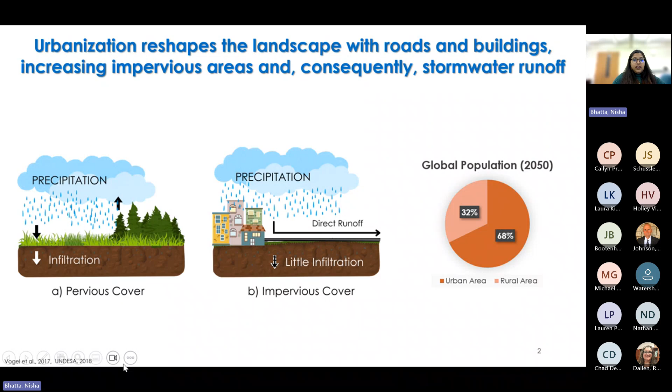So to manage the stormwater, we rely primarily on gray infrastructure. Gray infrastructure includes systems like pipes, channels, culverts that are designed to convey stormwater directly to a destination. These systems are effective in flood protection in many scenarios. However, the gray infrastructures in many areas are aging and their existing capacity to manage larger volumes of stormwater is decreasing in areas across the country. They often come with drawbacks such as faster flows and altered channels, which can lead to increased flood risk and significant water quality degradation.

So to improve stormwater management, a modern and sustainable approach is established, which we know as green infrastructure. They use vegetation, soils, and other elements and practices to restore some of the natural processes required to manage water and create a healthier urban environment. Instead of just conveying stormwater, it passively treats the water while managing the runoff. Green infrastructure helps to reduce the volume and peak flow. It also enhances infiltration, recharges groundwater, and ultimately improves water quality.

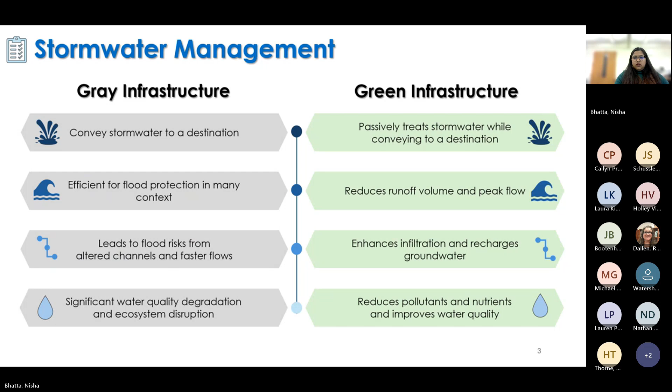Why is my slide not working? Sorry, there were some technical difficulties. Our screen froze here. So yeah, I will just go back.

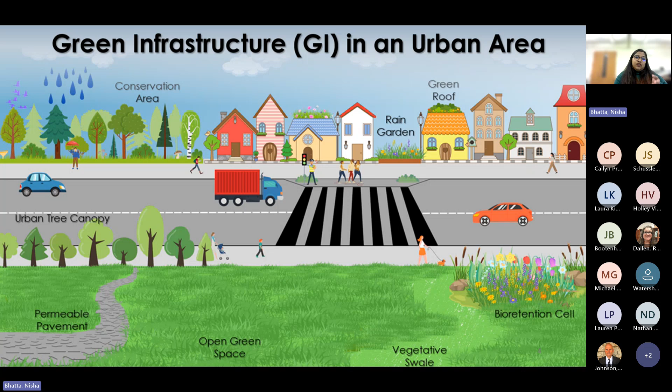When green infrastructure is installed throughout a community, a city, across a regional watershed, it can provide cleaner air and water as well as significant value for the community with flood protection, diverse habitat, and beautiful green spaces. So the overarching objective of my research was to select and evaluate the performance of green infrastructure for managing stormwater runoff using a decision tree framework and hydrologic modeling.

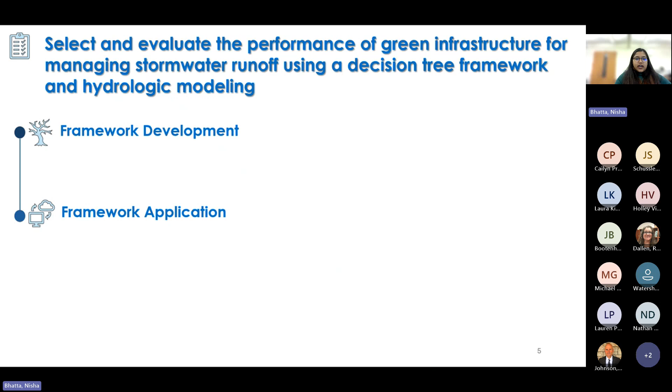To do that, I divided my objective into two different parts. One was framework development and the other is framework application. Using diverse literature, we developed a decision tree framework for the selection of green infrastructure practices, and to apply the framework to a case study area, the Washington School, we analyzed 30 years of local rainfall data, that means the Stillwater rainfall data, to determine the rainfall pattern, and lastly, applied the Personal Computer Storm Water Management Model, aka PCSWMM, a modeling software to assess the impact of different green infrastructure practices on the site hydrology.

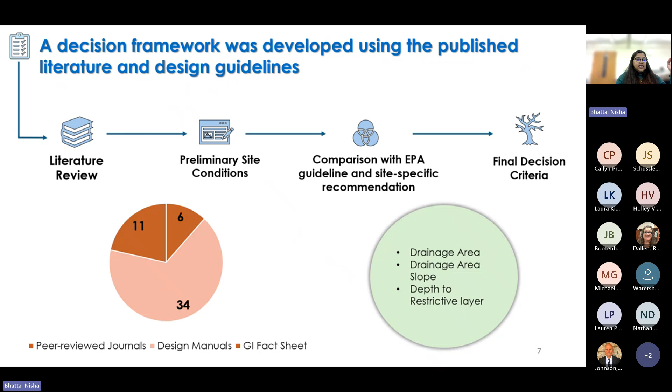Focusing on my first objective here, to develop the decision tree, I used published literature and design guidelines to select preliminary site conditions such as drainage area. In this process, 6 peer-reviewed journals, 34 different state manuals and 11 green infrastructure fact sheets from EPA were reviewed. After selecting these preliminary site conditions for each green infrastructure, I compared them with EPA guidelines and site-specific recommendations for different states. And then these 3 final criteria were selected and each GI was assigned to different categories.

Now I am going to walk you through my decision tree framework. So the framework starts with the distance from the green infrastructure practice to the existing structure or building foundation. If it is less than 10 feet, non-infiltration based practices are recommended. And if it is more than 10 feet, infiltration based practices are recommended.

Because infiltration based practices allow water to percolate into the soil, if these are placed too close to a building, the increased water infiltration weakens the soil around the foundation, leading to settling, cracking, or structural damage. Next, we have the drainage area, which is categorized into 4 categories.

That means less than or equal to 1 acre, less than or equal to 5 acre, less than or equal to 10 acre, or no restriction, which means the drainage area may not have any effect on this practice.

Following that, we have depth to restrictive layer, for example groundwater table. For most green infrastructure practices, the depth of restrictive layer from the bottom of the practice should be at least 2 feet, because if the restrictive layer is too shallow, water cannot infiltrate properly and may pool within the GI practice, reducing its efficiency.

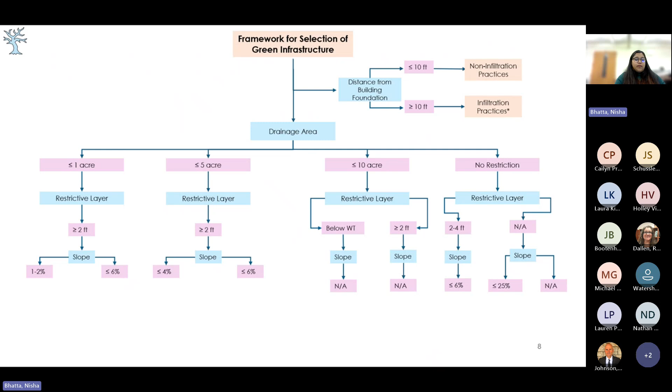Finally, we looked at the slope of the site area as a percentage. Some practices may require low slope, whereas some practices can be installed in high slope areas as well. Based on this criteria, each GI was assigned into different categories.

After developing the framework, we selected Washington School in Stillwater, Oklahoma as our case study and applied the framework to this case study site. Washington School was established in 1938.

It was the first school to offer a high school diploma to Stillwater's African American community. This school was centrally located in the floodplain and intentionally beyond both city limits and flood insurance bounds, an area residents refer to as the bottoms.

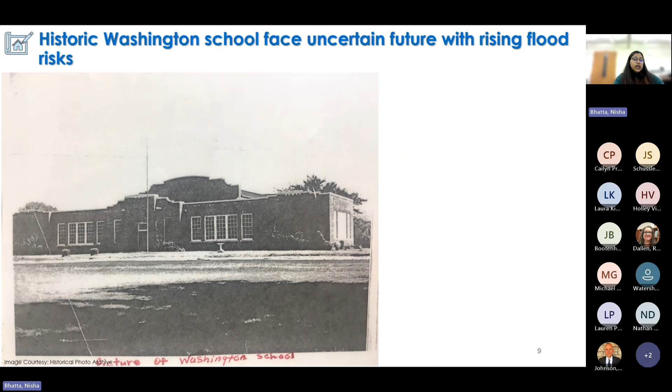Historical photo archives suggest that the school was flooded during the 1957 flood. Also, more recently, in 2019, the school was flooded as well.

Currently, the Washington School Alumni Association is working towards revitalization and wants to turn this school into a community center. Green infrastructure will provide an opportunity to increase Washington School site resiliency in wet weather events while providing open green space for the community to enjoy, as it did in the 1940s. For this reason, this school was selected as the case study site.

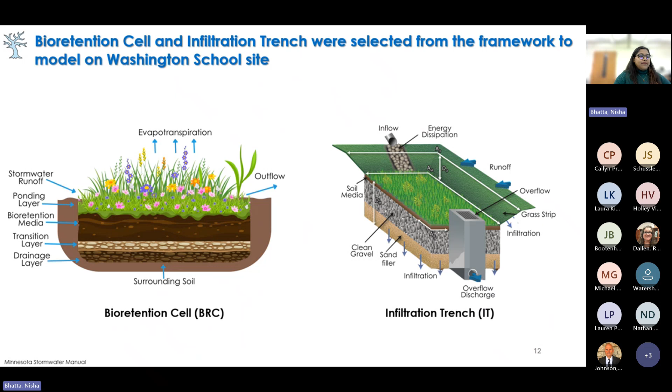The next practice is the infiltration trench, which is like narrow ditches filled with gravel that intercept runoff from upslope impervious areas. It usually has multiple layers, starting with grass and then soil media, followed by a gravel and sand layer. They provide storage volume and additional time for the captured runoff to infiltrate native soil below.

Now moving on to my second objective of my research. I looked at the rainfall pattern of Stillwater, Oklahoma to see which SCS rainfall type is best fitted for this region. I needed the pattern for hydrological modeling in the final and third part of my study.

The SCS rainfall method, developed by Soil Conservation Service, is used to estimate rainfall distribution and runoff. This method used synthetic rainfall distribution patterns type 1, type 1A, type 2, and type 3 to represent how rainfall intensity changes over time during a storm. Type 1 represents low intensity, long duration rainfall, whereas type 2 represents high intensity rainfall distribution over shorter duration.

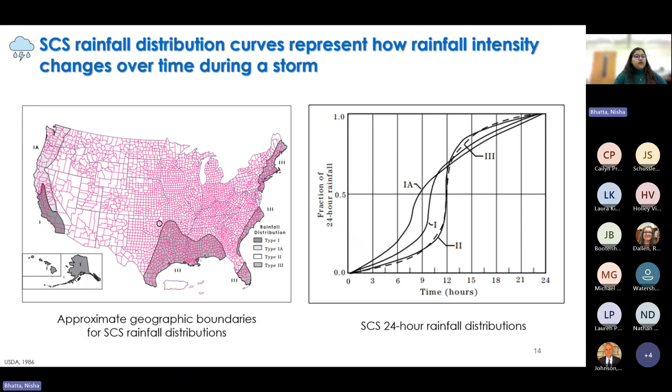According to USDA, Stillwater falls under the type 2 rainfall distribution, and type 2 regions are very close to Payne County as well. However, with the changing climate, we are seeing many rainfall pattern shifts worldwide. So to investigate the actual rainfall pattern for Stillwater, I analyzed 30 years of historical rainfall data for this part.

This slide outlines my methodology for the second objective. The process begins with data collection and processing, where 30 years of 5-minute interval rainfall data from 1994 to 2023 was divided into 3 decades to identify any change in rainfall over time, and the same analysis was also conducted for the full 30-year period.

Following this, storm events are identified using a 6-hour gap, and the top 200 storms were selected per decade, as well as for the full 30-year period. Next, the selected storms undergo normalization, where time and cumulative rainfall values are scaled from 0 to 1 that allow for consistent comparison across the storms.

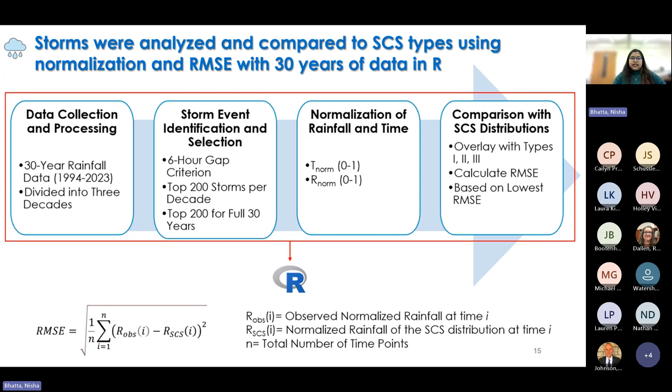Then the normalized storms were overlaid with SCS rainfall distribution, and root mean square error is calculated to quantify how closely observed storms match these standard types, with lowest RMSE indicating the best fit. The following equations shown in the slide were used to calculate the best fit curve, and all of this analysis was done in R programming.

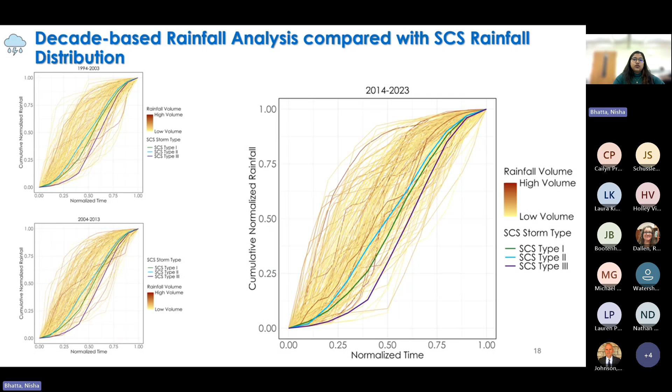Looking at the rainfall analysis results, this is the first decade from 1994 to 2003. All 200 storms were categorized from low to high volume based on total rainfall. Then each rainfall was compared to SCS type 1, type 2, type 3 to see which curve's RMSE value is low and best suited. This is for 2004 to 2013, and this is for 2014 to 2023.

Now looking at the RMSE value for each decade, the results show that SCS type 2 rainfall pattern is the best fitted for Stillwater, with almost 80% type 2 storms for each decade. From 1994 to 2003 has 76% type 2 storms, whereas 2004 to 2013 has 81.5%, and 2014 to 2023 has 79%.

After this decade-based analysis, we also did the same analysis for the entire 30-year period of rainfall, which also indicates that SCS type 2 provides the best fit for the Stillwater region, with 79.1% of type 2 storms.

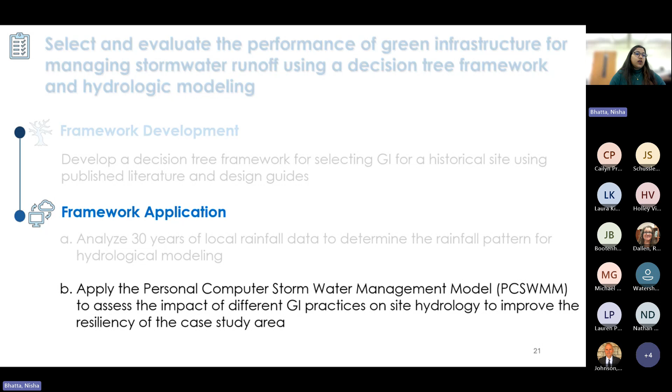Now moving on to my final and last objective, to apply the PC-SWMM model to assess the impact of green infrastructure. PC-SWMM is a comprehensive modeling software developed by CHI that is used for simulating and analyzing urban drainage systems, stormwater runoff, sewer networks, and the impact of green infrastructure.

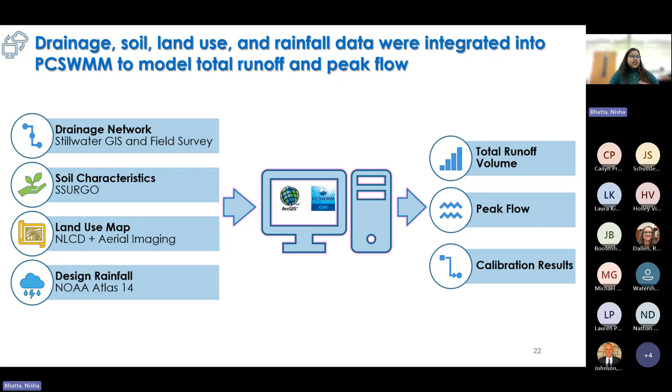My overall methodology for the PC-SWMM model is this. I needed the drainage network, soil, land use, and design rainfall data, which were obtained from various sources. In the next few slides, I will dig a little bit deeper into each of these data sets.

The network was collected from the city of Stillwater. However, there were some missing attributes for conduits and junctions. So we conducted several field surveys to collect those attributes, which included depth, cross-section, diameter, top width, and bottom width, and also the pipe materials for Manning's n.

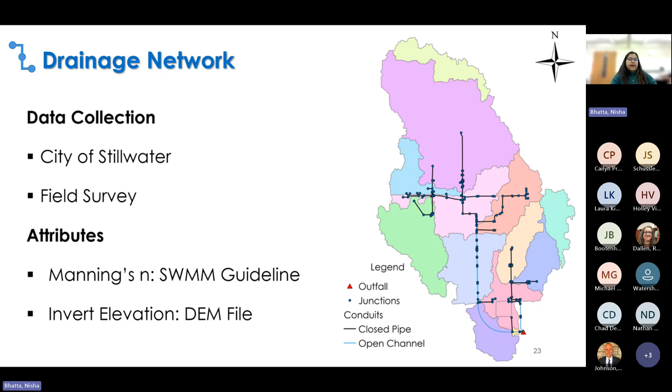The rest of the attributes were either assumed with standard values or analyzed using the upstream and downstream attributes.

One of the very important parameters for any PCSWMM model is the soil characteristic, which I needed for each subcatchment. After dividing the watershed into smaller subcatchments, I calculated the attributes of each subcatchment, which heavily depend on the hydrological soil group. This is a classification of soils based on their runoff potential, with four categories: A, B, C, and D, where A has the lowest runoff potential and D has the highest. In my watershed area, there were three types of soil: B, C, and D.

The saturated hydraulic conductivity of a soil is a crucial parameter that describes how easily water can move through porous materials when they are fully saturated. All of these values were collected from the Web Soil Survey and SWMM manuals.

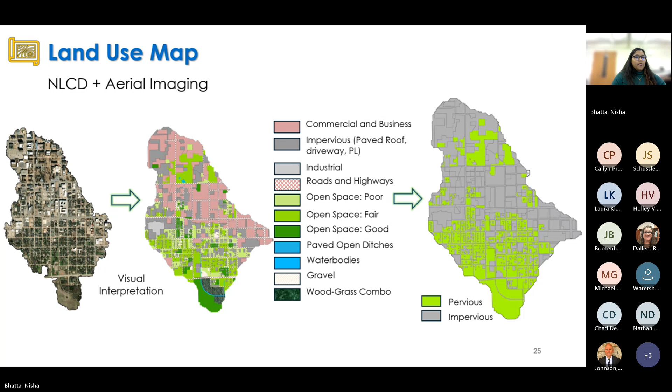Finally, I needed the design rainfall for my hydrological model. Design rainfall is the amount of rainfall used in planning and designing stormwater management systems such as drains, culverts, and flood control structures. It is based on historical rainfall data and represents a hypothetical storm event of a specific duration and intensity that a system should be able to handle.

To design a rainfall, four types of data are needed: rainfall pattern, return period, storm duration, and total rainfall. From objective 2, we already found that the rainfall pattern is SCS Type 2. The storm return period, also known as the recurrence interval, refers to the estimated frequency of a rainfall event of a certain intensity and duration, typically expressed in years, like 1 year, 2 year, 5 year. A 5 year return period was selected for my studies.

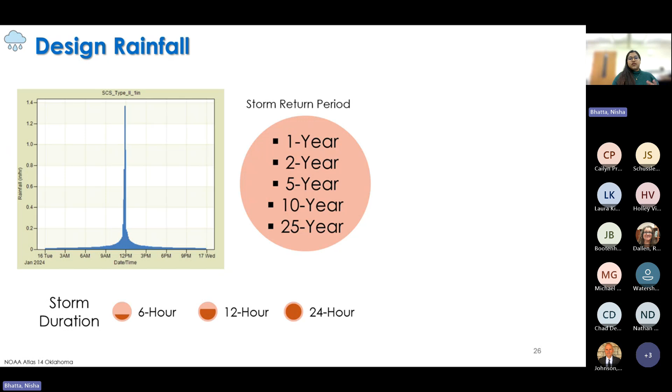Finally, I selected storm durations for 3 different storms, like 6, 12, and 24 hour, to see how green infrastructure performs under different durations of rainfall. We also got the total rainfall from NOAA Atlas 14 for each of these storms. So a total number of 15 design rainfalls were developed in this study, which is shown in the table.

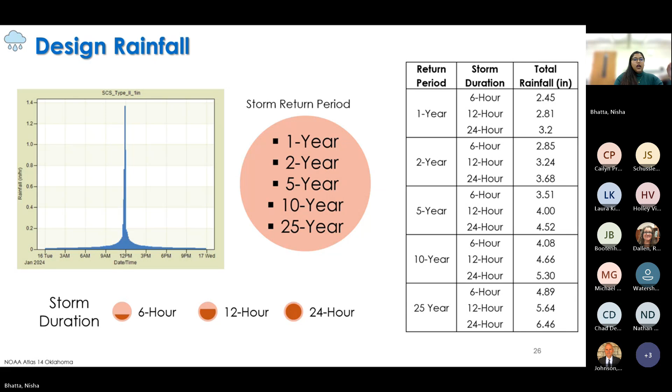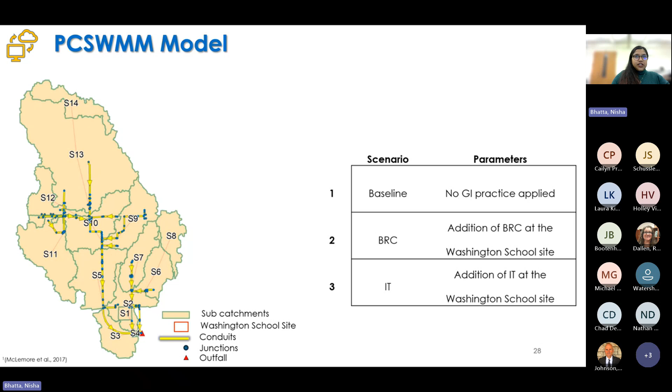Now that I have all of my data, this is my PCSWMM model, incorporating all of the layers like subcatchments, conduits, and junctions. We then created three scenarios: one is a baseline scenario with no green infrastructure practice, and then BRC and IT, with bioretention cell and infiltration trench respectively.

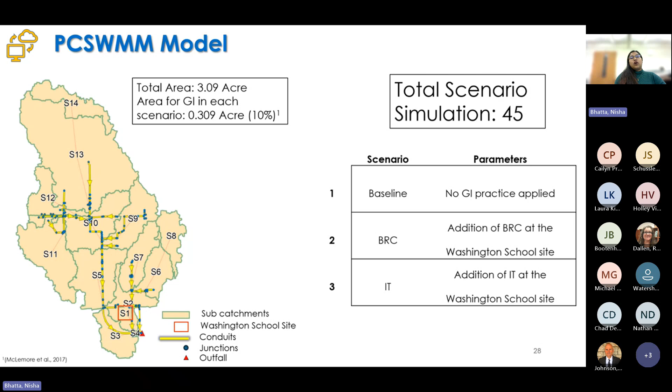With 15 different design rainfalls, the total number of scenario simulations was 45. Each green infrastructure practice has an area of 0.309, which is 10% of our site area, the Washington School area.

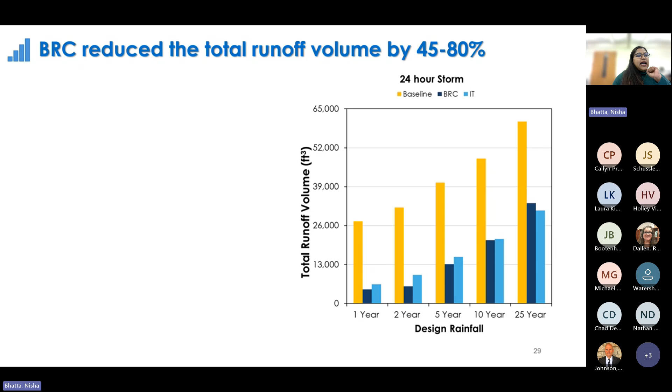This figure compares the total runoff volume for different design rainfall events under three scenarios for 24-hour storms. The result shows both GI practices reduce the runoff volume significantly compared to the baseline. However, their effectiveness varies depending on the storm's intensity. The BRC is effective for managing smaller to moderate storm events but becomes slightly overwhelmed during extreme rainfall, whereas IT provides better performance under high intensity due to higher infiltration capacity.

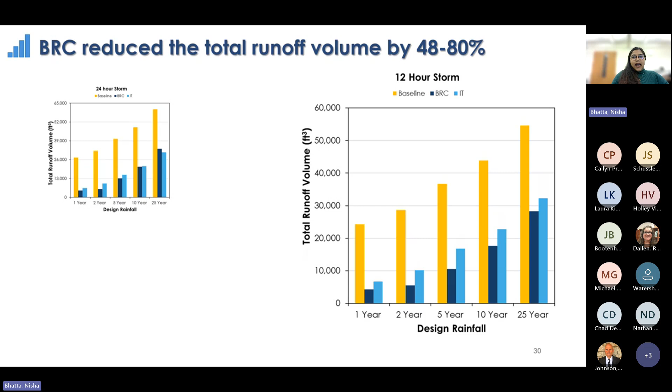For 12-hour storms across all return periods, the bioretention cell consistently achieved better runoff reduction compared to the infiltration trench. And for the 6-hour storm, the bioretention cell again outperformed the infiltration trench by reducing the runoff volume from 53 to 80% across different return periods. The results suggest that the bioretention cell is effective to manage stormwater runoff for smaller to moderate storms, but may not be as effective for larger storms. Comparing both practices' performance in the model simulation, the bioretention cell is clearly a better solution for this site in this study.

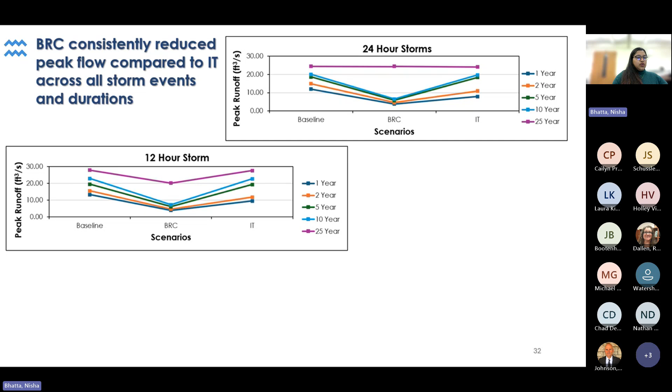Next, we measured the peak flow reduction. This figure compares the peak runoff rates in different design rainfall events under these three scenarios. For the 24-hour storm, BRC shows similar trends like the reduction of total runoff volume. It was able to reduce the peak runoff significantly for smaller to moderate storms, but did not reduce peak runoff for the 25-year storm. For the 12-hour storm, BRC outperformed IT across all storm scenarios, reducing the peak runoff by 28 to 71%. A similar trend was seen in 6 hours, like the 12-hour storms. BRC was the most effective in reducing peak runoff based on this study as well.

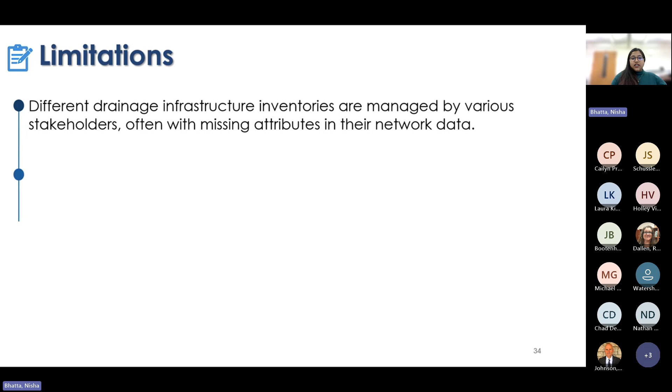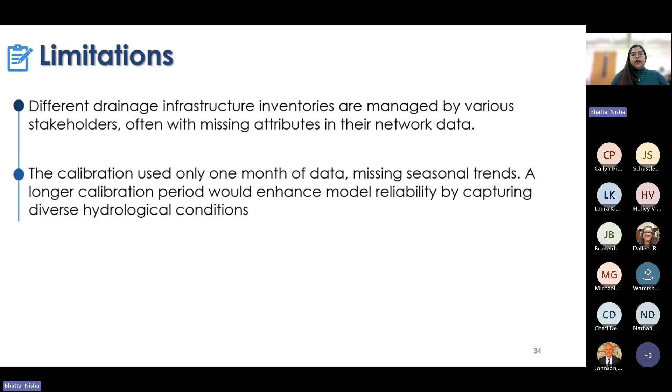Having said that, we are acknowledging the limitation of the study that different drainage infrastructure inventories are managed by various stakeholders, often with missing attributes in their network data. And PCSWMM heavily depends on the hydraulics of the model, so that will be one limitation of this study. And the next limitation is the calibration used only 1 month of data, missing seasonal trends. So a longer calibration period would enhance the model reliability, which is ongoing currently.

Key takeaways from my research: developing a tailored framework for selecting effective green infrastructure practices for flood-prone sites, focusing on site-specific factors. Next, despite the national trend of changing rainfall, Stillwater still has the SCS Type II, consistent and supporting reliable modeling outcomes. The simulation showed that the bioretention cell is the most effective in reducing peak runoff and controlling volume for the Washington school site. And the combination of decision tree framework, rainfall analysis, and PCSWMM modeling offers a replicable method for sustainable green infrastructure solutions at other sites.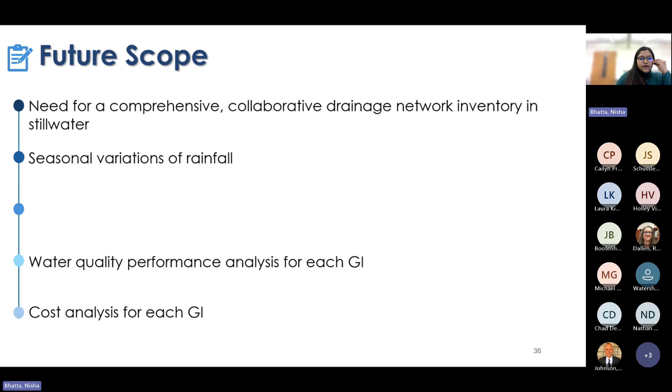My future recommendation for this study is we need a comprehensive and collaborative drainage network inventory. We also need to look at the seasonal variation of the rainfall affecting the model. We need water quality performance analysis for each GI. We also need to do cost analysis for each GI and identify suitable upstream locations for green infrastructure practices to manage the stormwater runoff in the upstream.

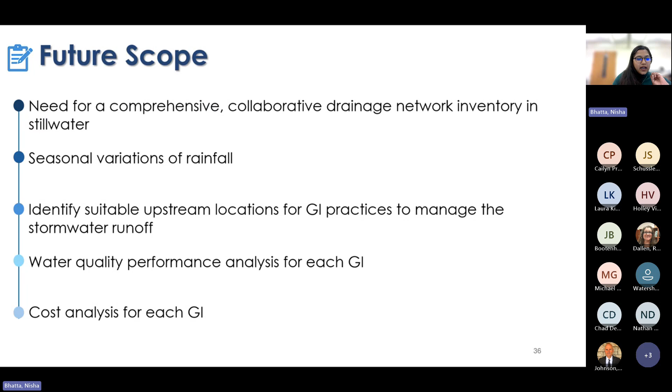I'm sorry, I have no idea how my animation messed up here a little bit. Sorry for that.

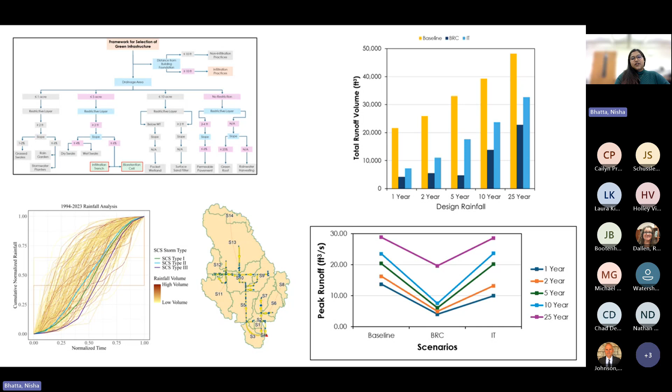And finally, this is a summary of my whole research project. We developed a framework, analyzed our rainfall, developed a PCSWMM model, and finally found the total runoff volume reduction and peak runoff reduction for green infrastructure practices.

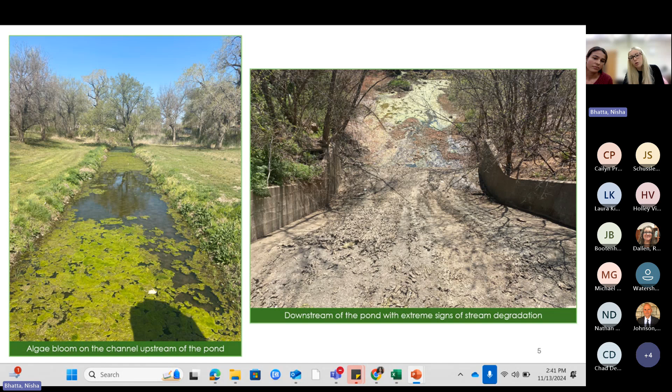So this is the inflow stream. As you can see, there's major algae growth, there's no riparian buffer. If there's any flow, it's not quite visible. And then the other picture shows the spillway that leads to the outlet stream. It's quite a steep spillway. We can also see that there's no water flowing off it continuously. We can also see below that there's major stream erosion going on down here. So lots of things to fix.

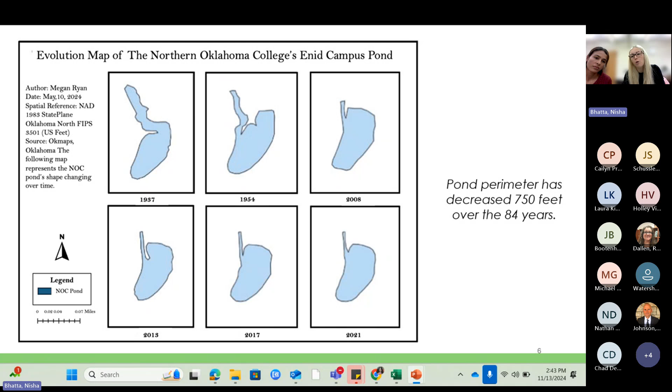And then fast forward to 1954, a similar shape, however, it is still changing, but we can make out how this would change. And then if we fast forward to 2008, it's very different than what it was in 1954. And this shape has continued until 2021, with some type of, I guess, erosion occurring. So I compared 1937 to the 2021 perimeter, and I found that this actually decreased by 750 feet over this 84-year time period.

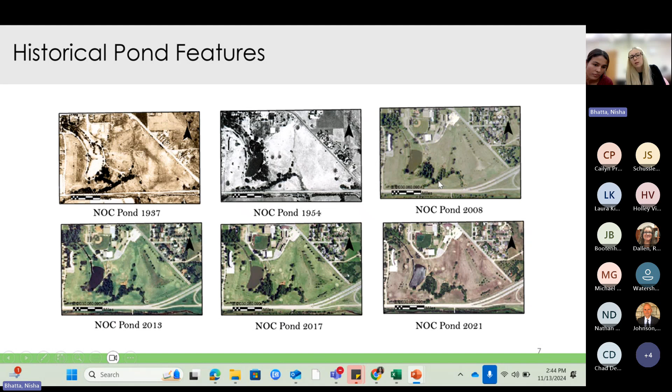We can also see a slight increase in vegetation. There's a few more trees in the 2008 to 2021 series of photos than there is in the 1937 to 1954 series of photos. So here's two of the objectives we're going to talk about today and what we'd like to accomplish. We want to identify opportunities to increase recreational use and encourage habitat in and around the pond. And then our second objective is to develop a green stormwater infrastructure plan for sustainable stormwater management around the pond.

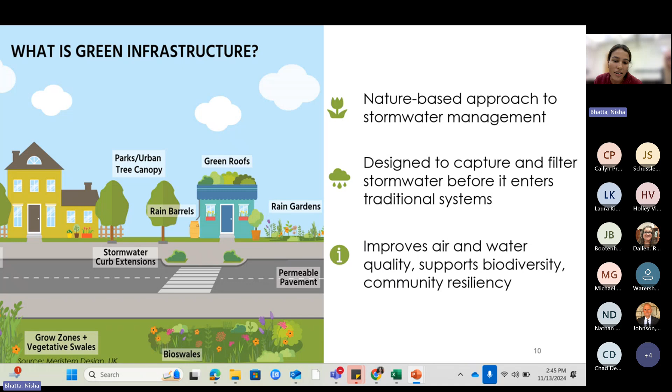So, as we all know, green infrastructure is a nature-based approach to stormwater management. They are often termed nature-based solutions or low impact development. And these are very beneficial in capturing and filtering stormwater before it enters our traditional drainage system. There's several benefits of green infrastructure, such as it helps in improving air and water quality, helps our landscape look prettier, supports biodiversity, and helps make our community more resilient against the changing climate. There's several types of green infrastructure, as you can see in this picture. There are green roofs, rain barrels, rain gardens, and all of them serve the same purpose, which is stormwater management.

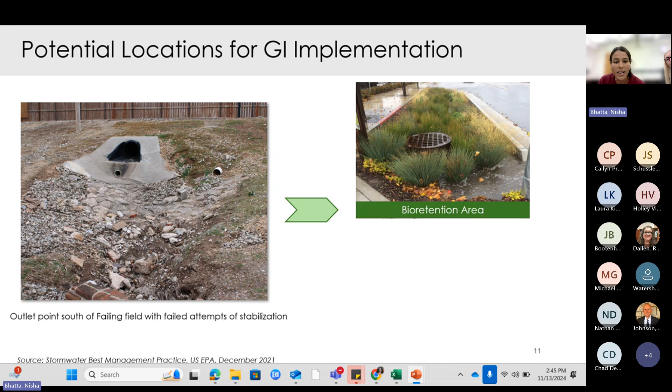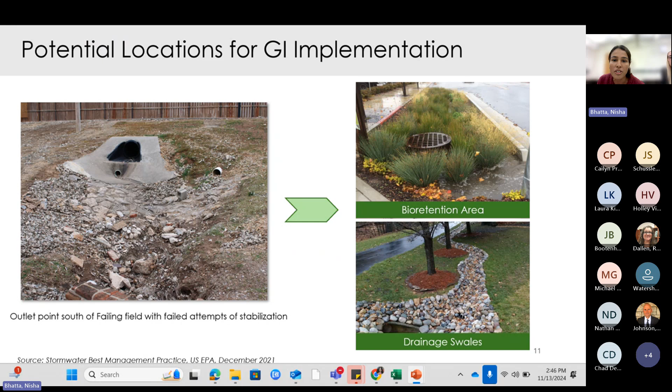So in this area, we can add a bioretention area, or we can also use a drainage swale. It will help in slowing down the water, which will help in reducing the erosion, as well as it will help the water infiltrate into the ground, capturing sediments and reducing the runoff volume.

This is another area, which is a parking lot, also located very close to the same baseball field, and you can see several signs of washout. So when it rains, all of this gets picked up by the stormwater runoff, which eventually ends in the NOC pond. So for this, we can have a parking lot bioretention.

We can also opt for permeable pavement. But for this location, we are also considering relocating it to a different location because this area is a little slopey. And we are planning to turn this area into more greener space.

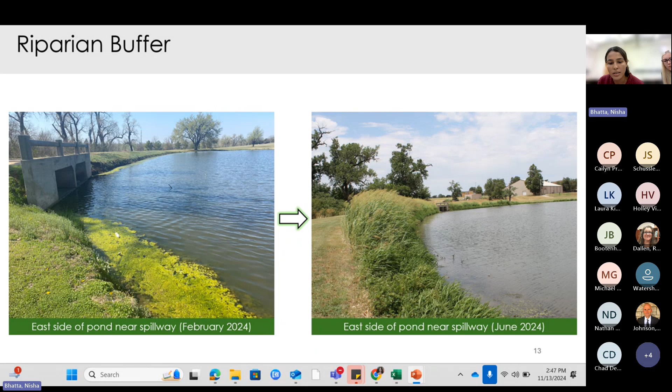And as you can see in the picture on the right, now we have plants that help in slowing down the water, capture some sediment and other trash, and also help reduce the bank erosion.

Okay, so now we're going to switch over to some of the baseline data that we've been collecting. So we wanted to get an assessment on the community side. So we distributed an online survey that should have taken about 15 minutes, and it had 25 questions on it regarding a few things. This survey was distributed to the NOC students, staff, and faculty, and it was also distributed to the community as needed via flyers.

We received 197 responses from the survey, and we found that most people that answered were students, some faculty and staff, and a few community members.

One of the questions addresses the current recreational usage. It says, if you or someone you know currently uses the pond or area surrounding the pond, what activities have you participated in? And it seems as though most people that use this area use it for walking. We have some people that use it for fishing, a little bit of golfing, and a little bit of dog training and biking.

Another question regarding recreation is we wanted to ask individuals, what is their level of satisfaction with outdoor recreational opportunities on the NOC Enid campus? And from what we received, people are mostly neutral with the satisfaction of recreational opportunities. Some are satisfied and some are unsatisfied. So a pretty neutral response for this question.

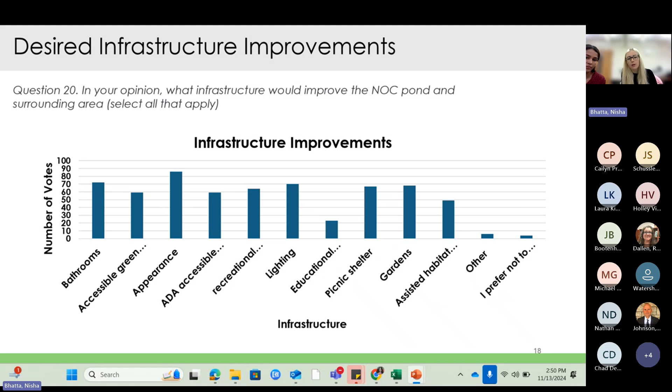In terms of infrastructure improvements, we asked this question: in your opinion, what infrastructure would improve the NOC pond and surrounding area? People mostly just want to see an improvement in the appearance of the area. They'd like to have some lighting here. Accessible bathrooms were popular as well. Yeah.

And then as for the education component from our survey, question 22 asked, how likely are you to observe or read informational signage, including the environmental/ecology function of the NOC pond? And it seems that people would be likely to read the signs, which helps us determine that it's okay to put educational signs up in the area. It's something that I was really hoping to do, so I was happy that people were receptive to this.

And then we also wanted to know how we could distribute progress on our restoration. So that's why we asked question 24, which says, what is the best way to educate Enid residents on potential infrastructure improvements on NOC Enid's campus? And it seems as though people would be okay with this being distributed through social media.

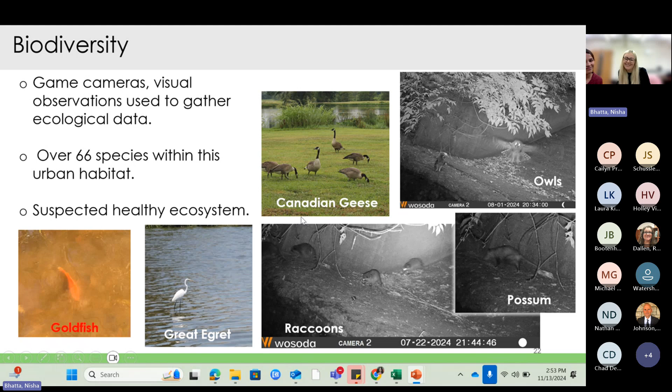An additional ecological assessment that I did was recording bird songs. So I used Merlin Sound ID, which is an app that records bird songs in the area and determines what species it is. So during our weekly site visits, I did a 30-minute recording each site visit, and I found 31 different bird species here. The most frequent species I found were the northern cardinal, the Carolina wren, the indigo bunting, and the American robin.

So I think this is interesting how many different bird species there are here, but I also think this is a great talking point for education signage. This gives us a good opportunity to create signage around bird species and kind of educating the public about what kind of species are here.

This is another assessment I did on vegetation. This is kind of an in the works assessment. I've only done one assessment thus far. So I took a 20-foot by 20-foot area just below the spillway in the wooded area. And I found that there were American elm trees, eastern redbud, and some juvenile red cedars here. I still have to do a few more assessments on this, but I think this is quite interesting and telling of what types of tree species are here.

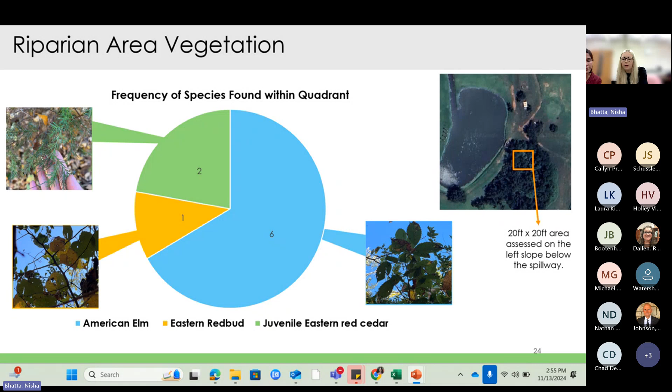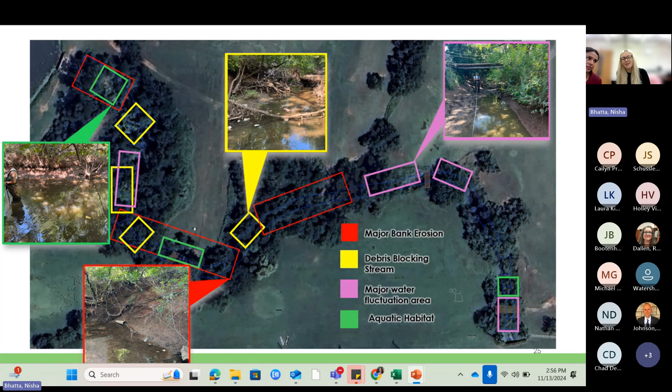And then the next week we would go here and there would be no water here at all. So I think this is also very interesting and kind of telling of where the aquatic species will reside more frequently. And then I also wanted to determine where the aquatic habitats were and where I saw aquatic species. So green areas are kind of areas where I found fish, frogs, some snake species, and some aquatic invertebrates as well.

So as you can see, there's major degradation going on in the outlet stream. So we've kind of come up with a draft restoration plan to improve this. We'd like to implement a riser structure that will allow us to reduce the flow of the outlet stream. And then our next step would be to clean up the debris in this stream. And then we'd like to decrease the slopes on some of these areas that have gully type erosion. And then in these areas, we'd like to implement live stakes, turf mats, and hard armor to kind of establish the vegetation here and make sure that erosion doesn't occur again.

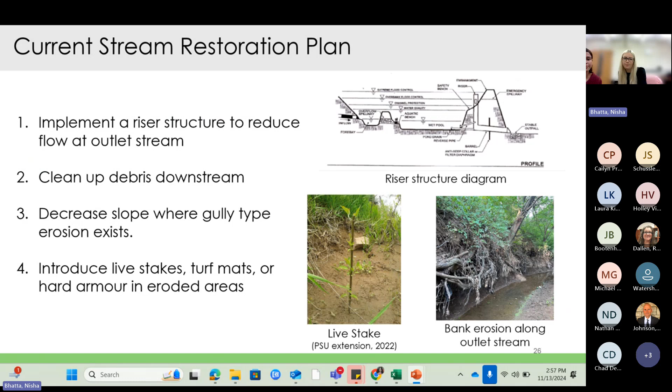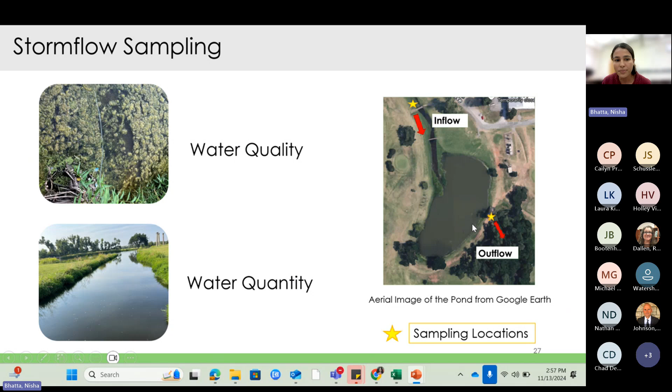So at the inflow channel, we have an ISCO auto sampler, which is connected to a rain gauge, and it's programmed to get triggered by 0.1 inches per hour of rain events. So whenever it rains, the auto sampler gets triggered and it starts collecting the water sample. There are in total 24 bottles, and each bottle is capable of collecting 800 milliliters of water.

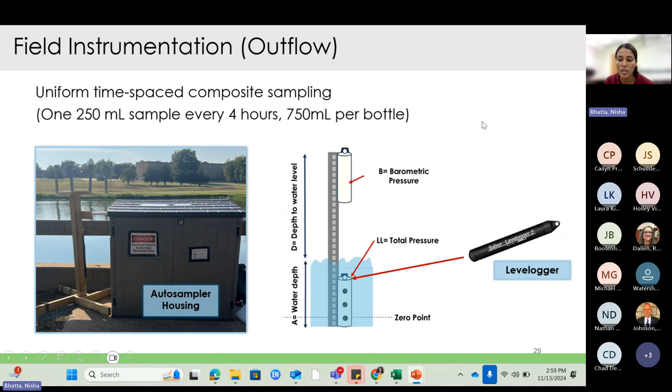This one is not connected to a rain gauge, but this one is programmed to collect water samples in uniform time spacing. And the water samples are composite sampling, which means it collects 250 milliliter sample every 4 hours. So in total, 750 milliliters per bottle every 12 hours. And we also have a level logger installed at the outflow, which is used for water depth measurement.

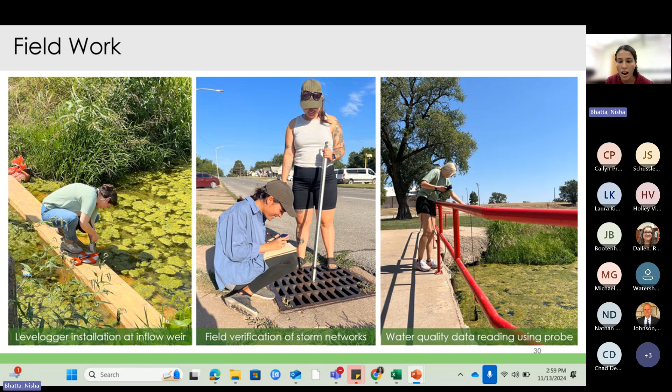And we have been doing water quality monitoring every week. So we have been using a YSI probe to read some water quality parameters, both at the inflow and the outflow of the pond. So using the YSI probe, we are looking at the pH, nitrate, temperature, and dissolved oxygen. We were trying to see if we can see any variation in these parameters with respect to the rain event.

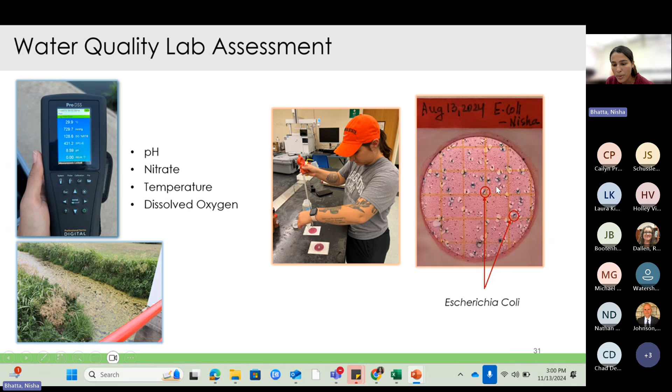And we have also been collecting grab samples during each site visit, and we analyze those samples for E. coli. As you can see in this picture, the blue spots with small air bubbles show the presence of E. coli. Other parameters that we're looking at are nutrients, which includes total nitrogen and total phosphorus, for which we are using reagents prepared by HACH. And then we are looking into total suspended solids and turbidity.

So we recently started doing total suspended solids. So we are trying to find a relationship between the turbidity and TSS so that we can also get the TSS value for the previous samples that we didn't originally analyze for total suspended solids.

We are not able to see a proper pattern with respect to precipitation, but the variation could also be because of the time of sampling, because during the daytime there was a lot of algae present in the water, and photosynthesis was going on, which increases the amount of oxygen and could have increased the DO level.

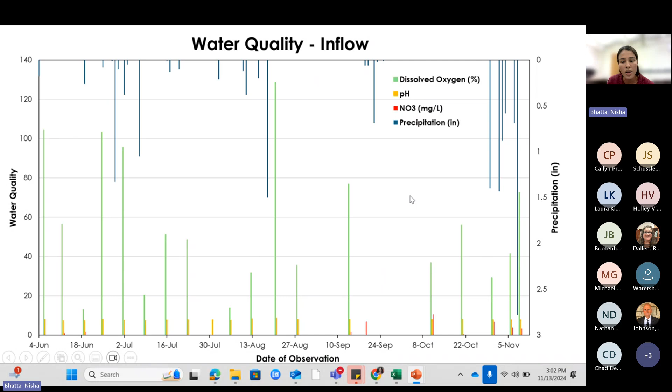But if we look at this graph, we can see that most of the time the DO level was less than 60%, and a lot of times it was less than 20%, which is very stressful for the aquatic species living in this pond.

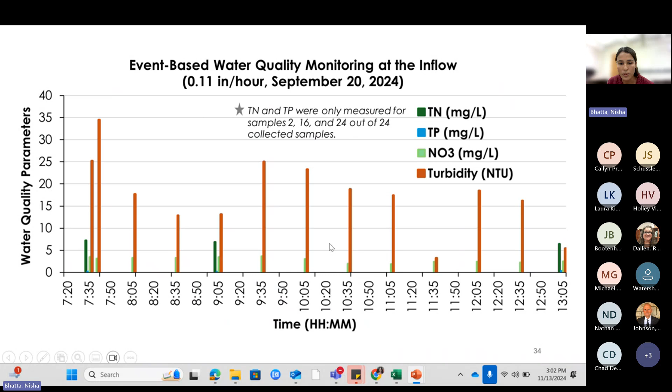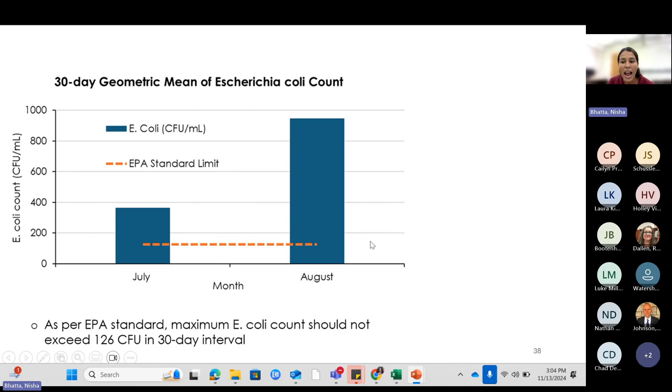And recently we did sampling, which was on October 31st, and we observed lots of E. coli — it was too numerous to count — and it was right after a rain event of 1.4 inches.

Another part of this project is stormwater modeling. For this, we are using PCSWMM, which is the Personal Computer Stormwater Management Model. For this, we added several parameters like rainfall, land cover, digital elevation models, soil type, and drainage networks.

Our main objective was to create two different scenarios: a baseline scenario that represents the current condition of our study area, and another with the implementation of green infrastructure, to see how it can help in managing stormwater runoff quantity and quality.

So the main output we can get from this model is a hydrograph, which is a runoff versus time graph, and a pollutograph that shows change in water quality over time.

First, we generated a watershed using a 2-meter resolution digital elevation model in PCSWMM. The watershed was pretty big, approximately 930 acres in size, so we classified it into smaller subcatchments, 16 in total.

We then used hydrologic soil group data from USDA SSURGO to identify the hydrological soil group classification in our watershed, and found that most of the area is group B type, meaning a moderate infiltration rate that ranges from 0.15 to 0.3 inches per hour.

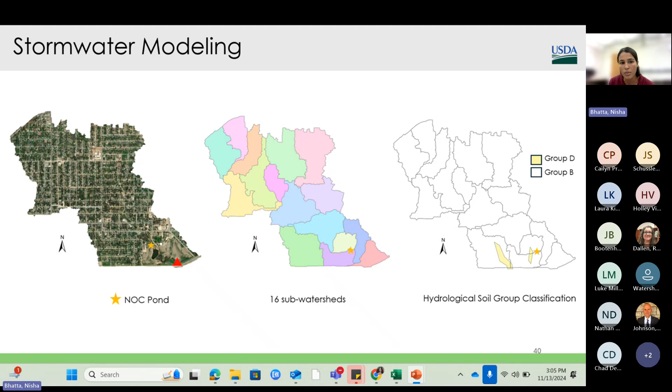So we created our own land cover classification map for better accuracy, dividing the whole watershed into several land cover classes such as commercial, forest, road, open space, and paved areas. We found that almost 30% of the area is impervious, which might not seem significant, but even if an area is classified as open space, if there isn't much vegetative cover, it might not be very good for infiltration.

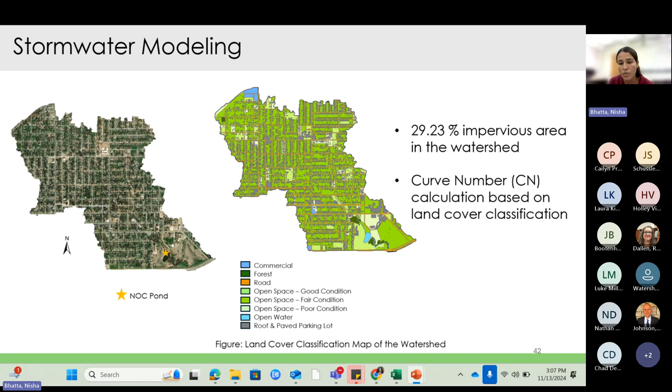Most of the area upstream of the pond was residential, with similar development intensity. This was specifically useful in calculating the curve number, which is the method we use for runoff estimation in our watershed.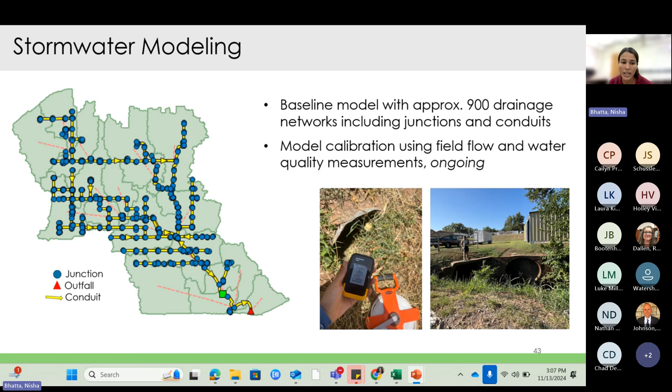We did some measurements, and in total there are approximately 900 drainage networks within this watershed. The flow and water quality measurements we've been doing will be super helpful for calibrating and validating this model.

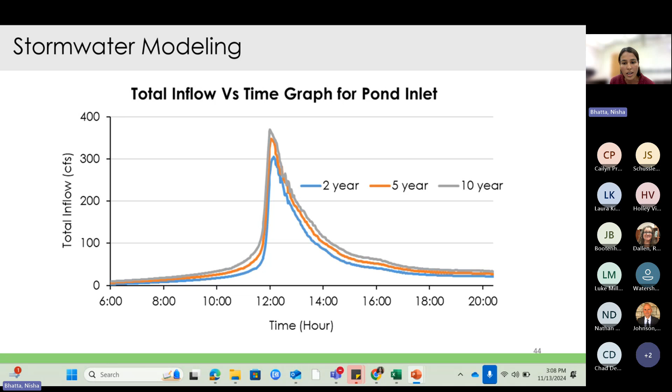With educational signage, I think it's important to note that having a boardwalk or dock like this can concentrate the disturbance of the pond where people can concentrate fishing to this area. It also gives something beautiful on the pond as well.

Another thing we did was come up with a native flower garden area, right in front of the first bridge on the outflow stream. We designed a walking path that will go all the way around the pond, and a portion going through the green space. We intend the sidewalk around the pond will be paved, and the sidewalk in the green space will be like gravel.

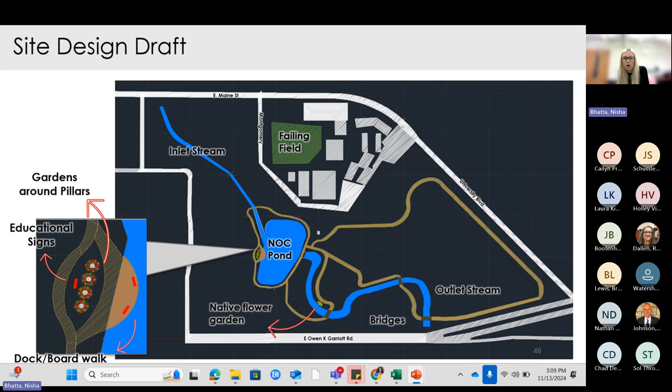This is a sign we created about the aquatic habitat at the pond. Here you'll see a green sunfish, one of the fish species found here, and a red-eared slider turtle, one of the common turtle species in the pond. Here's some algae and duckweed that's here, plus information about the riparian buffer and its importance.

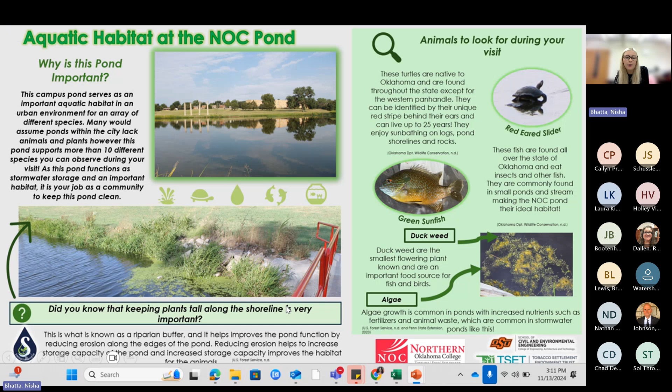As for our impact, spiritually this is a great place for people to reconnect with nature and recharge after classes or in the evenings. Intellectually, on a college campus, the educational signage gives students a place to decompress after a long school day.

Socially, we're creating a gathering place for the community. Physically, this is a place that can be used for recreation as we're trying to increase recreation usage.

As for our project next steps, Nisha's going to continue to calibrate the PCSWMM model and develop the green infrastructure plan. I'm going to do further assessments on vegetation, which will be used in biodiversity calculations. Then we'll collectively work on a project cost assessment and finish a final draft of our site plan.

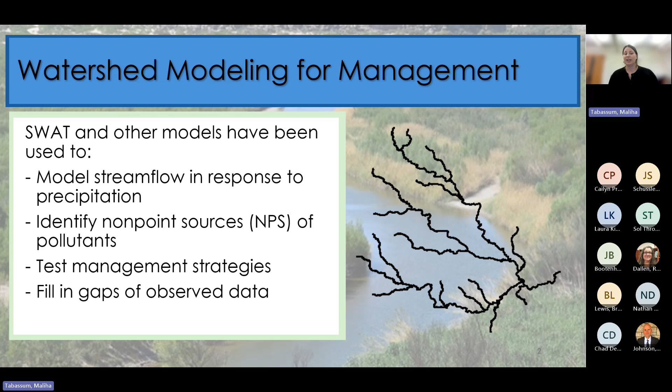The way that SWAT-based watershed models work is you start with a pixel of a standardized area, and then you add in elevation. This model, HAWQS, uses the digital elevation model, and through that you get the flow direction and path on the landscape. Then you add in land use data on top of that. OK.HAWQS uses the National Land Cover Database, or the NLCD layer, which gives you coefficients such as practice factor and curve number. In addition to that, you add soil data, using SSURGO data from NRCS, which gives coefficients such as soil erodibility, K factor, and other physical soil characteristics.

Once you have the watershed built, it uses established equations to represent the watershed you are modeling, and then you add meteorological data to produce outputs at a daily time step. OK.HAWQS gives you an option to choose from three different raster data sets: NEXRAD, PRISM, and recently it introduced future data sets, the CMIP5 data sets, so you can model into the future, I believe out to 2080.

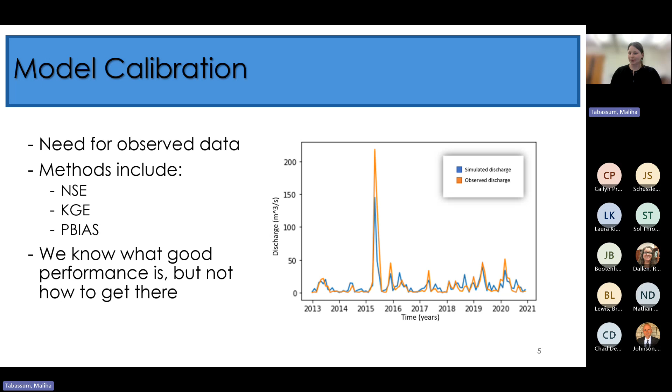One of the things that makes OK.HAWQS really fantastic is that it incorporates these calibrated parameters already. There are 34 stream gauges and 18 calibrated watersheds, so if you are modeling within one of those watersheds or near one of those 34 stream gauges, you can choose those unique calibrated parameters and apply them to your watershed model.

The data used for calibration ranges between 1983 and 2018, and the OK.HAWQS watersheds range from 100,000 square kilometers to 500 square kilometers. The calibration points are not evenly spread throughout the watersheds, and they are also not evenly spread throughout the state, so there is a range of data available throughout Oklahoma currently.

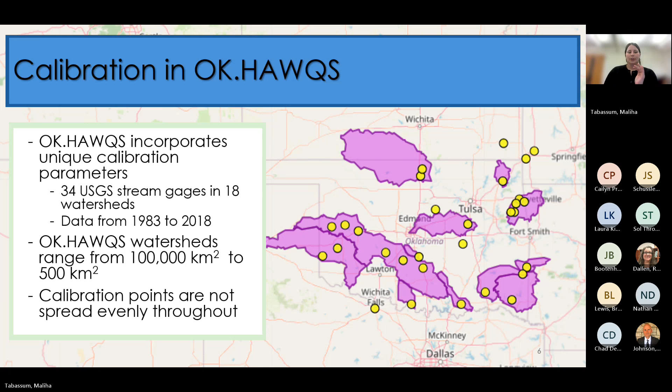To address the uneven calibration within the model right now, we designed a research project to investigate the calibration available in the model currently. The first research objective was to develop and calibrate an Oklahoma-specific HAWQS model. Katie Mendoza and the team at Texas A&M have already completed that first objective, and they have OK.HAWQS ready and available on the website currently.

The second objective is to assess the validity of the water quality outputs using just flow calibration as the mechanism. The third objective is to determine what threshold value of calibration sites is needed to have satisfactory model performance in a watershed.

We know if we have that one calibration site at the outlet of the watershed, we're probably going to have pretty good model performance right there. But how is our model performance going to be all the way at the headwaters of the watershed out here? And how will that change if we add another calibration site over here?

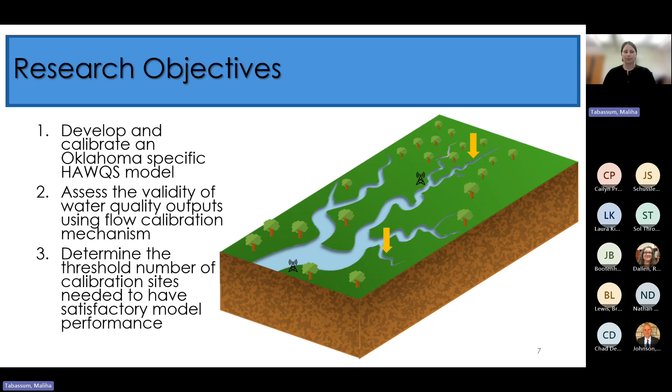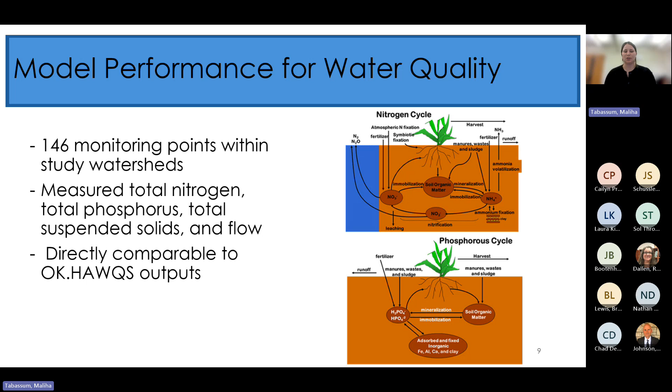And then we needed to go from OCC data to the model data to make the comparison. So OCC collects the data and stores it at the water body ID level. Nationally, we look at watersheds at the HUC-12 level, and those were spatially referenced. So we assigned all of the OCC points to their HUC-12, and then we looked at the SWAT ID number and the HUC-12, and we matched those up. So we could assign the OCC data points to the SWAT ID so that we could make a direct comparison from the measured data to the modeled data.

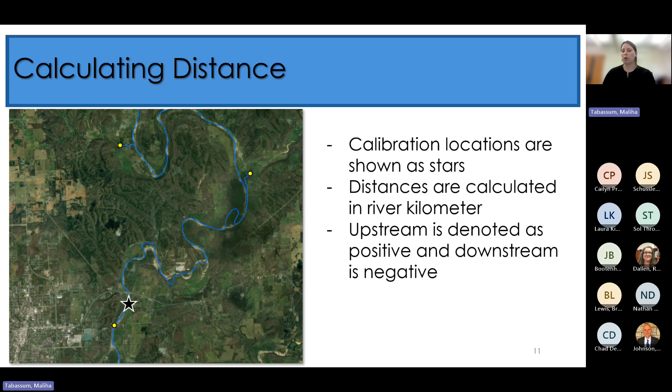And so the next steps for this project will be to determine the best performing water quality parameter in this flow calibrated model. And then from there, we can make recommendations for how to improve the model performance so that we can increase the usability for stakeholders in Oklahoma. If it's adding more calibration, changing the size of the watersheds that we are calibrating, or whatever that is, we want to increase the usability of this Oklahoma-specific watershed tool so that it's easier to use for stakeholders and managers.